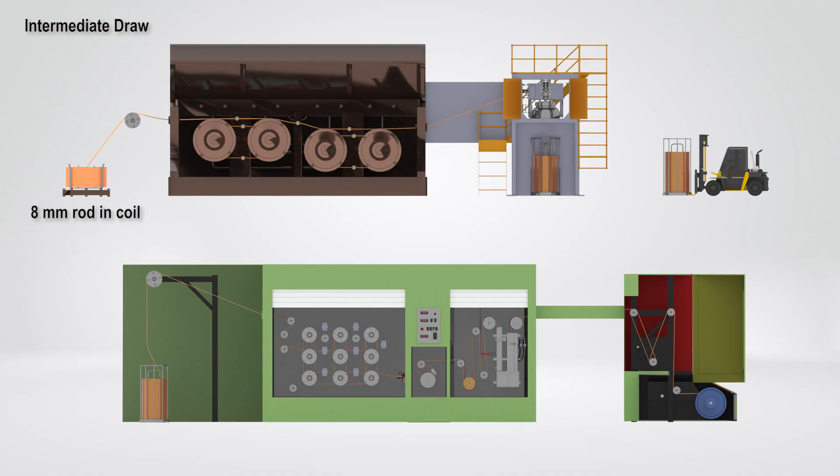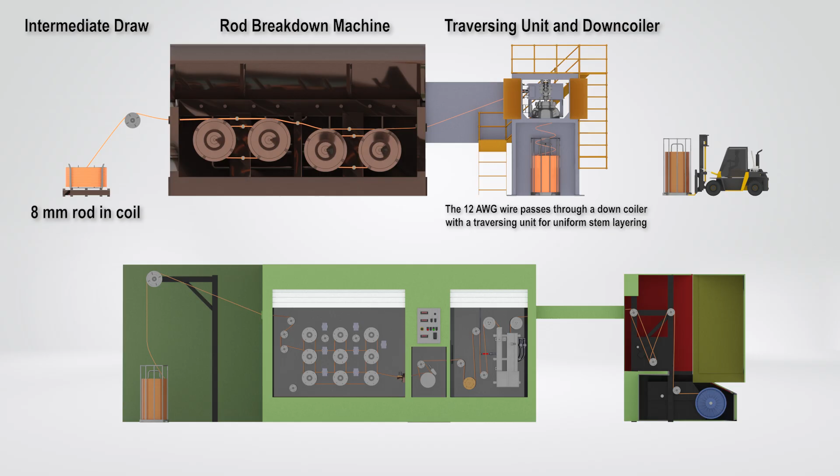Today, we're taking you behind the scenes to explore the foundational process of wire drawing. Wire drawing is a precise two-step operation that reduces the diameter of a copper rod to a finer gauge while preserving its surface finish and mechanical properties. As the first stage in conductor and cable manufacturing, the process involves pulling the copper rod through a series of progressively smaller diamond dies to reach the desired wire size.

Before drawing begins, the rod undergoes surface cleaning at the supplier's facility to remove oxides, impurities, or scales that could damage the dies during drawing. An oil-based or synthetic lubricant is applied to remove heat, reduce friction, and prevent die wear during the drawing process. The choice of lubricant depends on the intended application and drawing machinery requirements.

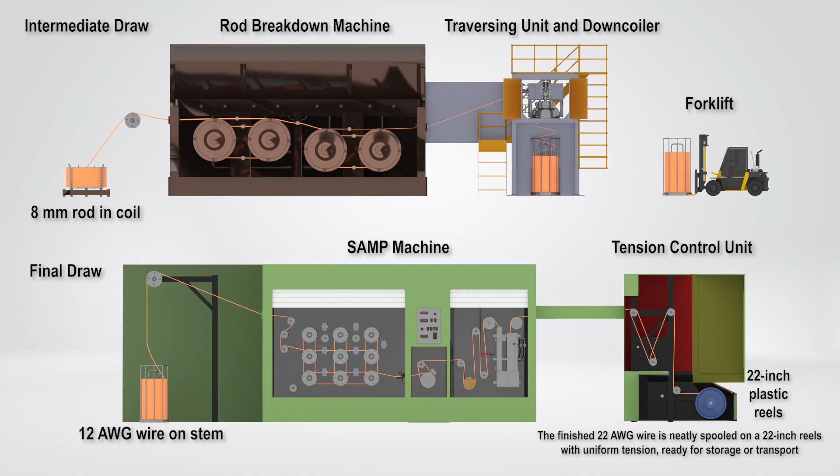The process starts with standard 8mm copper rod in coil form, made from C11000 electrolytic tough pitch copper (ETP copper) or C10100 oxygen-free electronic copper (OFE copper), depending on the application. Copper wire rod is electrolytically refined and soft-tempered, delivering excellent conductivity and workability.

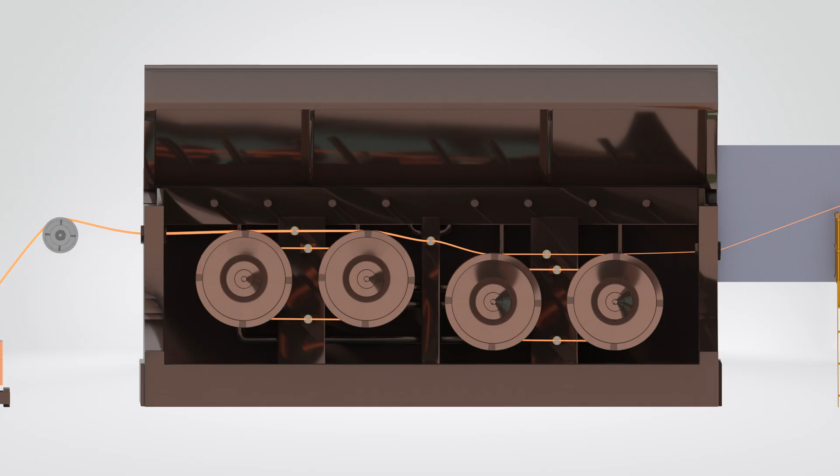The first stage of wire drawing, called the intermediate draw, is performed by the rod breakdown machine. In this stage, an 8mm rod passes through multiple dies, gradually reducing its diameter to typically 12 AWG, 2.053 millimeters. As the diameter decreases, the rod's length increases to maintain consistent volume.

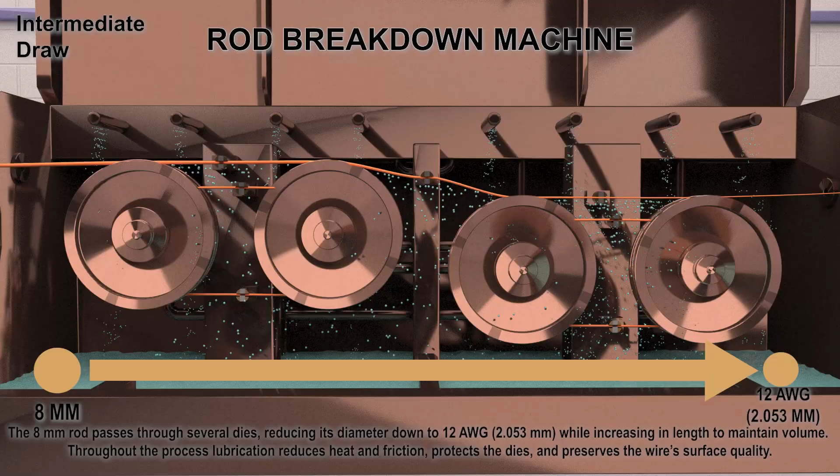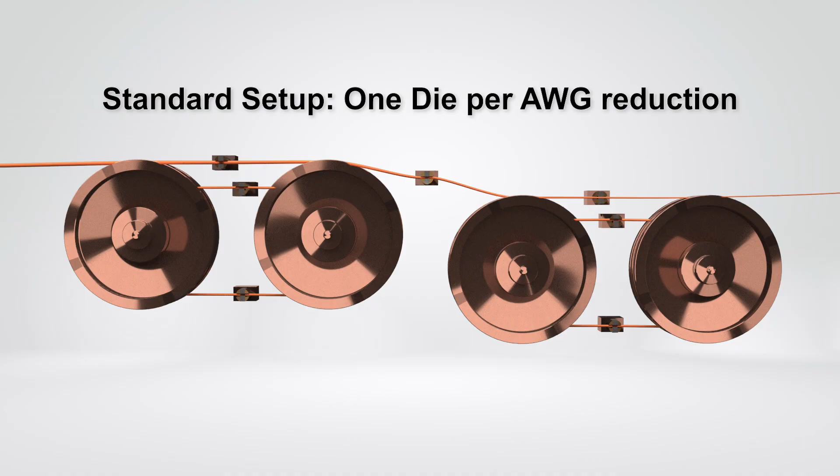After passing through dies, the wire reaches a hard-tempered state and won't be annealed again until it's drawn to its final gauge. Most dies reduce the wire by 1 AWG size, but machines with overdraft capability use fewer dies, cutting tooling costs.

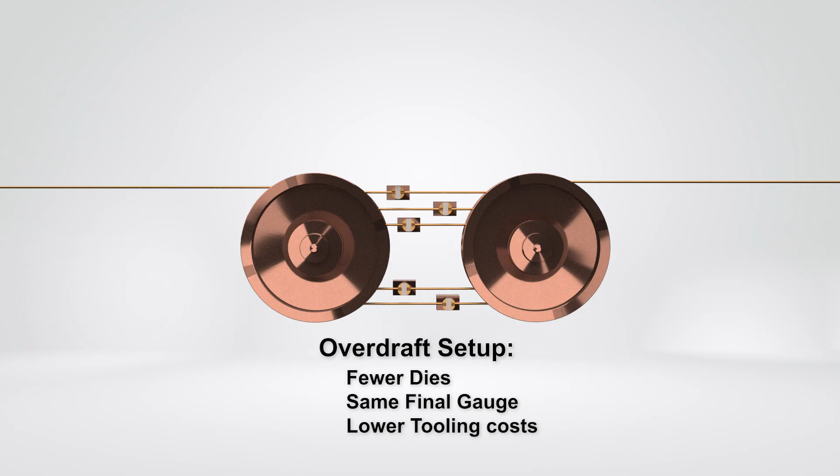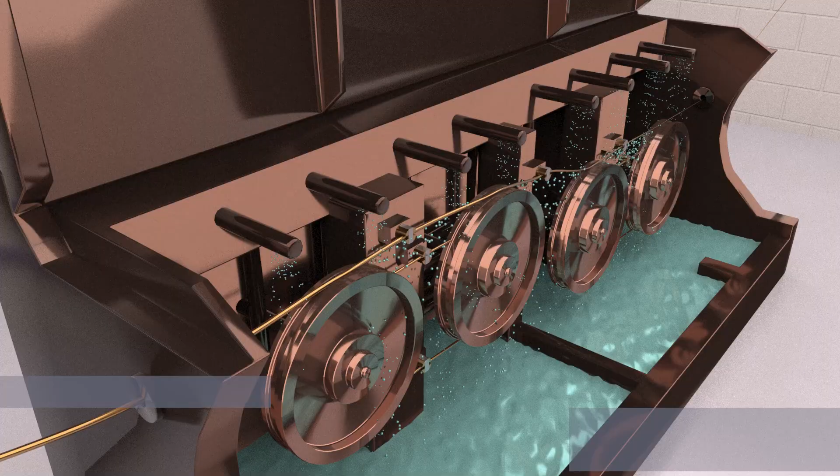Throughout the process, continuous lubrication minimizes friction and heat, protects the dies, and preserves the wire's surface quality. Oil-based lubricants are economical and commonly used for larger diameters, while synthetic lubricants are ideal for finer wire and cleaner operations, but may be more expensive to maintain.

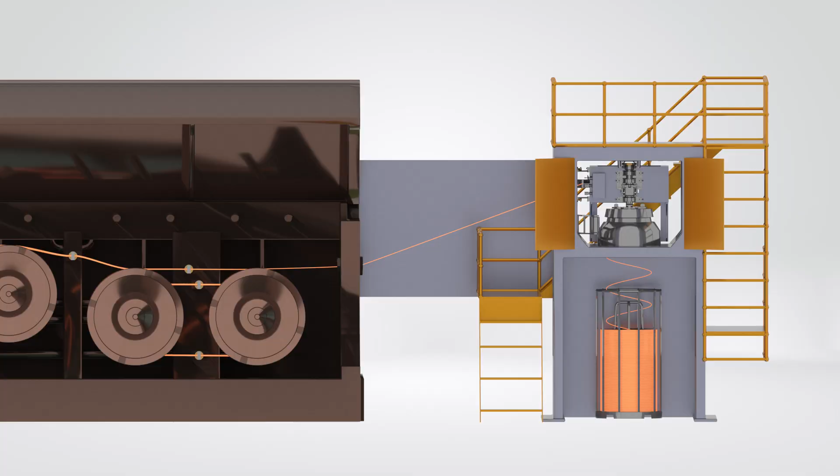The 12-gauge wire is then routed through a down coiler equipped with a traversing unit that ensures uniform layering onto the stem. This organized coiling prevents tangles and enables smooth unwinding during the next drawing phase. The coiled wire is collected into a 4,000-pound capacity stem, ready for the next operation.

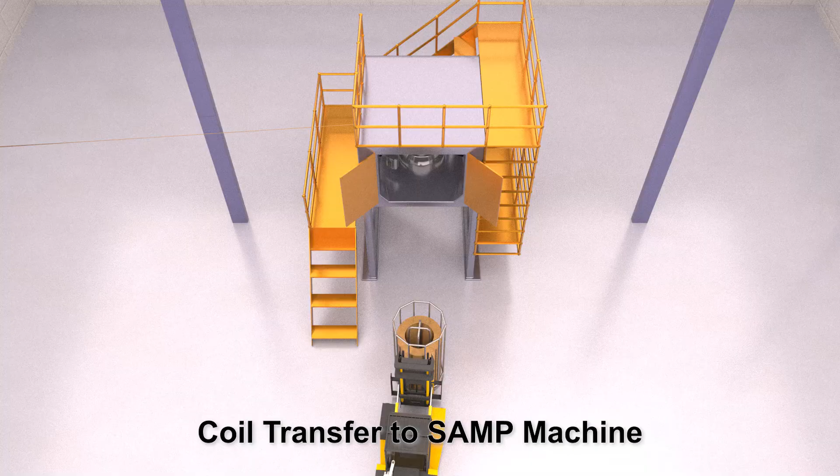The filled stem is transported by forklift to the SAMP machine, where the wire undergoes its final draw. A high-mounted pulley system guides the wire into alignment for its final pass, where precise dimensions and surface quality are achieved. The SAMP machine is where the wire achieves its final diameter and a precise surface finish. It houses a series of integrated components that work in perfect coordination.

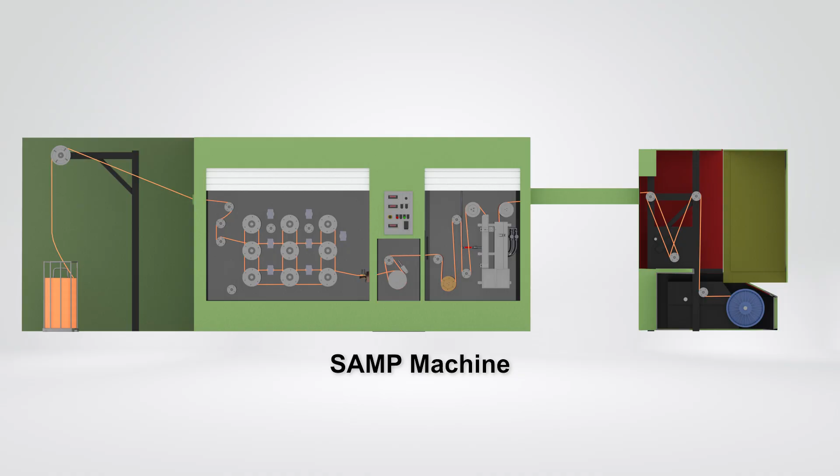The draw section terminates at the finished die and finished capstan. The inline annealing section. The cooling section. The tension control spooling section. A digital controller, accessed through the digital control panel interface, ensures that these four components work in unison.

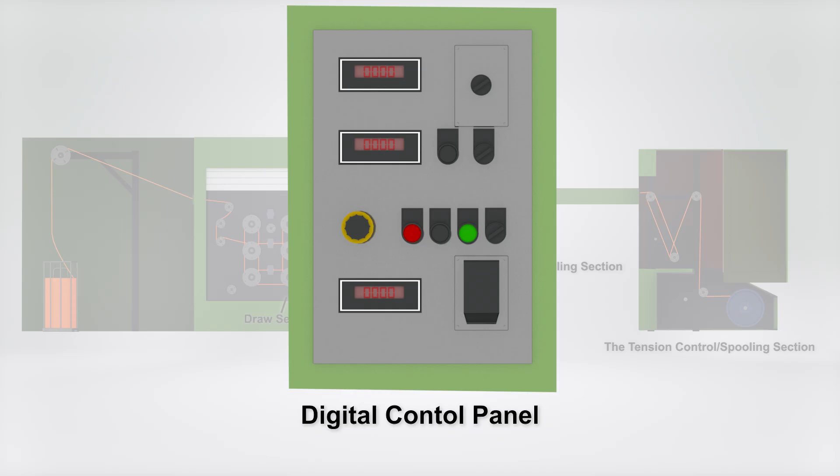Inside the draw section of the SAMP machine, wire is pulled through a series of precision dies and capstans, which work in tandem. This precise alternate arrangement ensures uniform elongation while protecting the surface from stress or scoring. Each die reduces the diameter of the wire, while each capstan pulls it forward and maintains controlled tension.

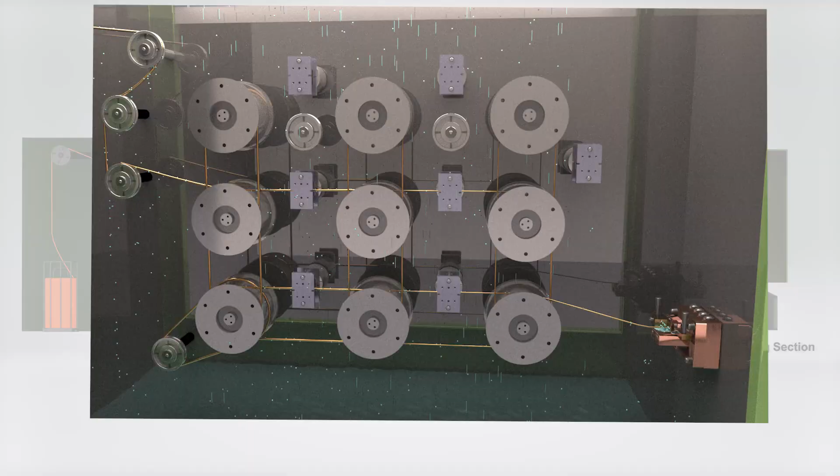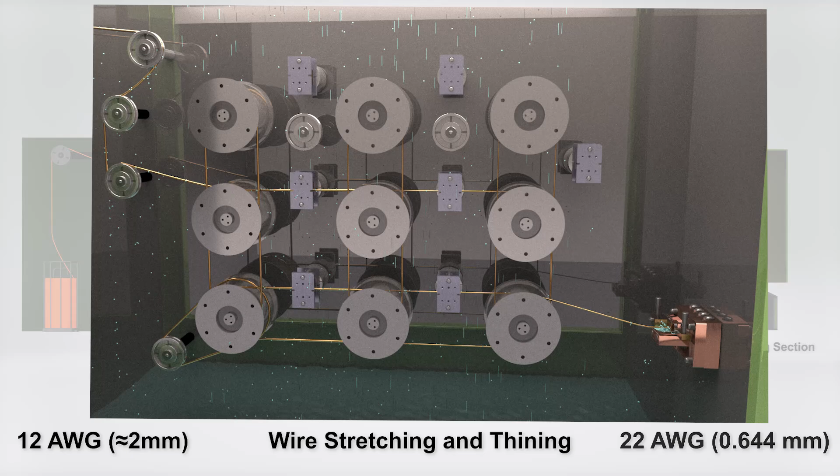The wire enters at 12 gauge, or roughly 2 millimeters, and is gradually drawn thinner as it passes through each die capstan pair. Before exiting the draw box, the wire proceeds directly into the finished die, where the wire reaches its final diameter, 22 gauge or 0.644 millimeters. The finished capstan pulls wire through the finish die and directs it into the annealer section.

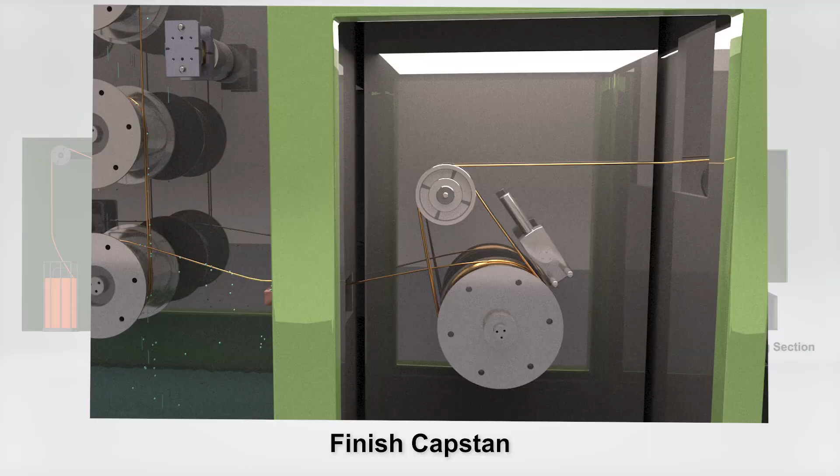To maintain production efficiency, drawing machines operate at speeds reaching hundreds of meters per minute. The digital control panel continuously monitors and adjusts line speed in real time, ensuring smooth movement, stable tension, and perfect synchronization across all SAMP components. Proper tension ensures uniform wire diameter reduction without breaking. As RPM levels rise or fall, the wire's motion through the drawing and annealing sections shifts accordingly.

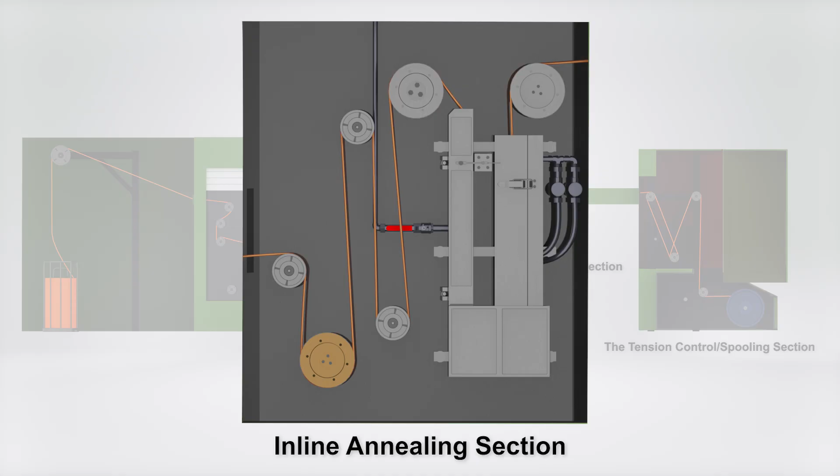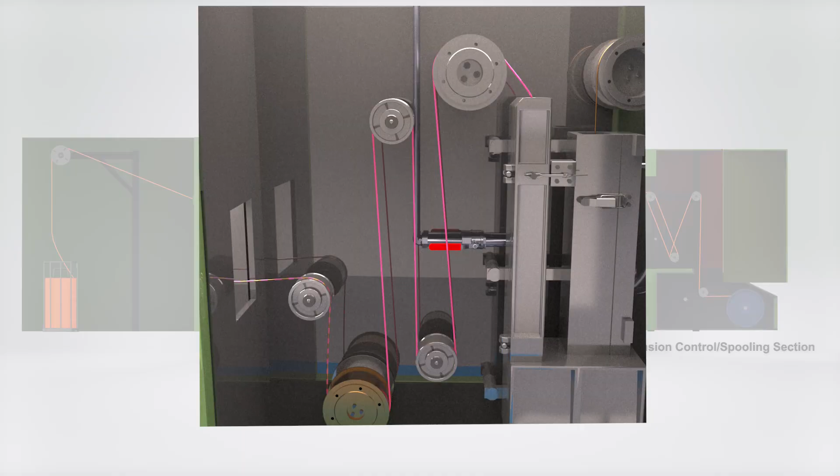We move on to the inline annealing section, the key component responsible for heating the wire to the necessary temperature for annealing. This section begins at the initial annealer contact pulley, where current is first introduced into the wire. Then wire passes over a series of conductive pulleys, which maintain a steady connection while spinning. The current flow initiates the resistive heating process, preparing the wire for annealing.

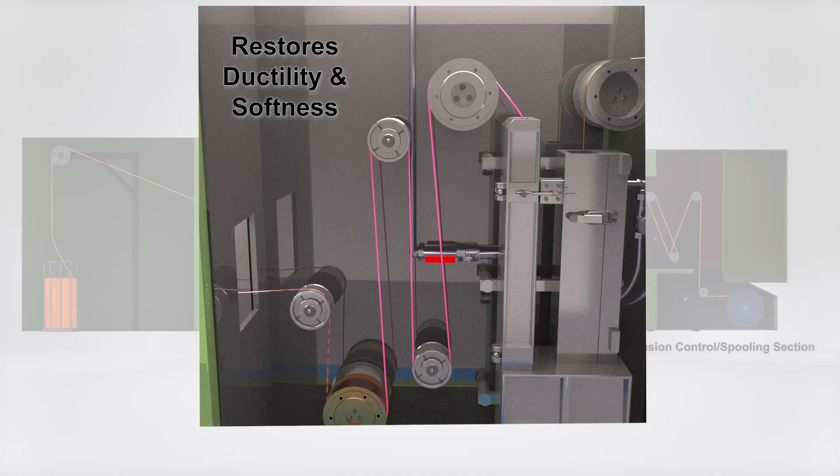In the inline annealing section, the wire itself becomes the heating element, generating heat as current passes through it, and this localized heat softens the wire, relieving internal stresses accrued during the draw process. The annealing process restores ductility and soft temper, transforming the conductor into one that is flexible and ready for further applications. Annealing occurs at specific temperatures, typically between 350 and 650 degrees Celsius, depending on the desired level of softness.

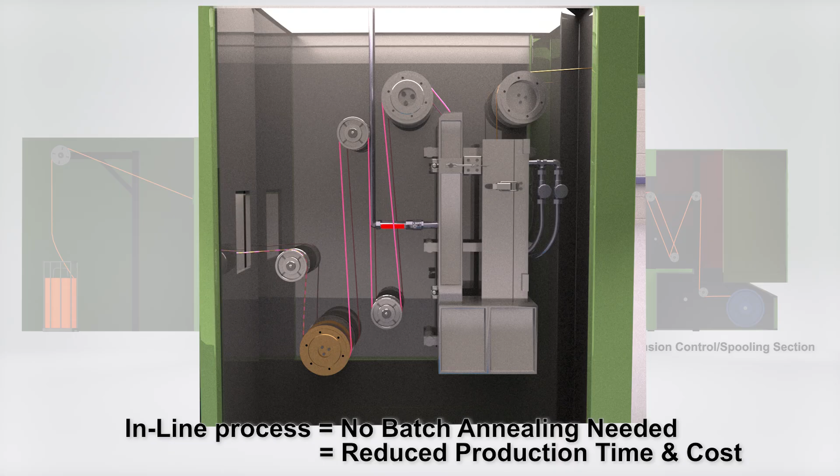Continuous inline annealing is a manufacturing advantage. It eliminates the need to batch anneal reels of hard wire, allowing for significantly lower production time and cost.

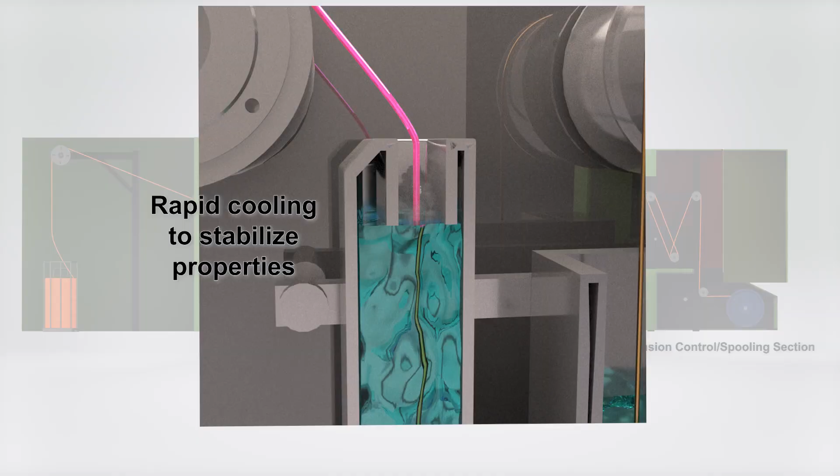As annealing is completed, the wire proceeds towards the cooling section. Immediately after annealing, the hot wire is submerged in a cooling section filled with circulating fluid. This rapid thermal shock halts the annealing effect and locks in the mechanical properties. The wire is now stabilized and ready to be spooled.

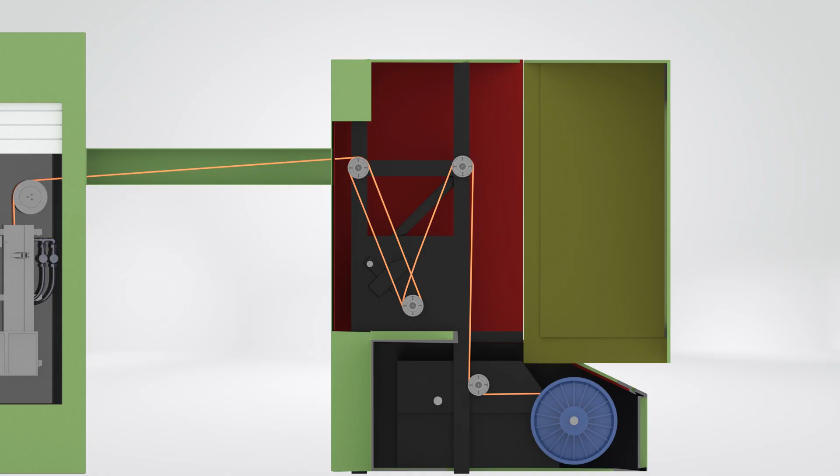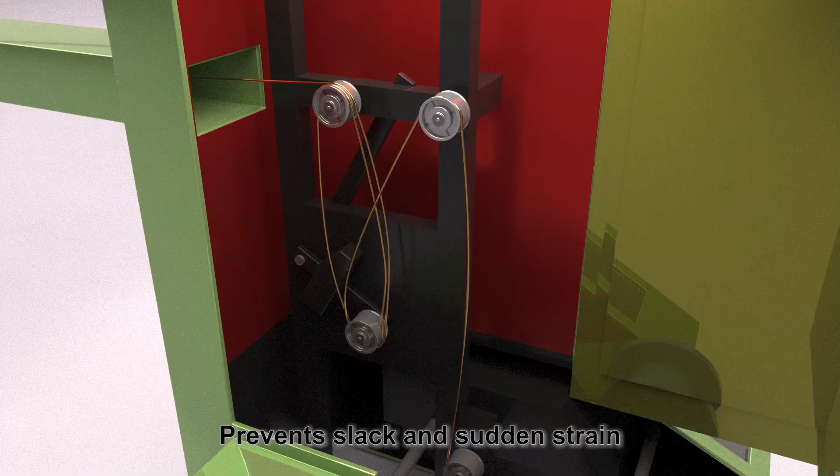Next, the wire passes through the tension control unit. As the wire softens during annealing, it becomes more vulnerable to deformation, so maintaining consistent tension is essential. The unit adjusts automatically for speed variations, ensuring smooth and controlled movement between the draw machine and the spooler. This guarantees that the wire is wound evenly, without loops or inconsistencies, while preserving strength and integrity.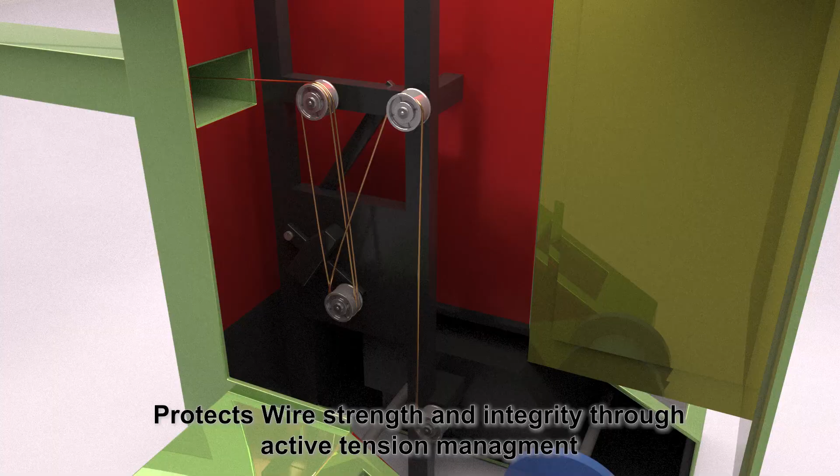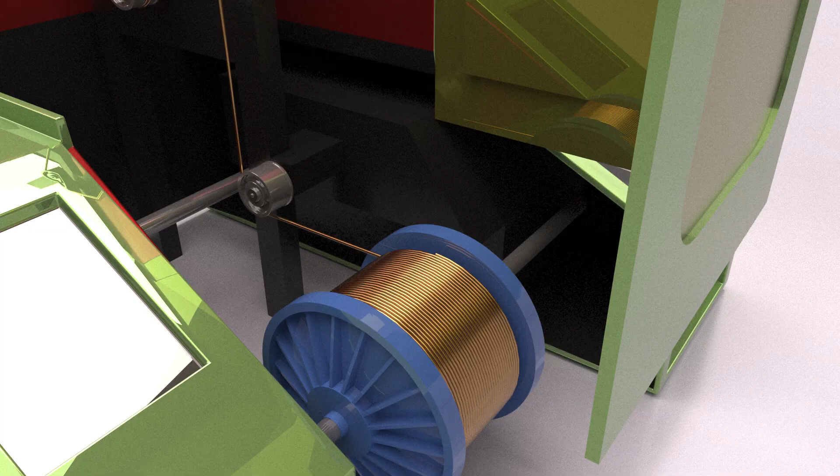From here, the wire moves toward its final destination, the spool. It travels upward, guided into the spooling station. Here, the finished 22-gauge wire is spooled on 22-inch plastic reels. Thanks to the tension control unit, the wire wraps neatly, with even layers, without stress or slack. Each reel, identical in form and quality, holds wire that is ready for storage or transport.

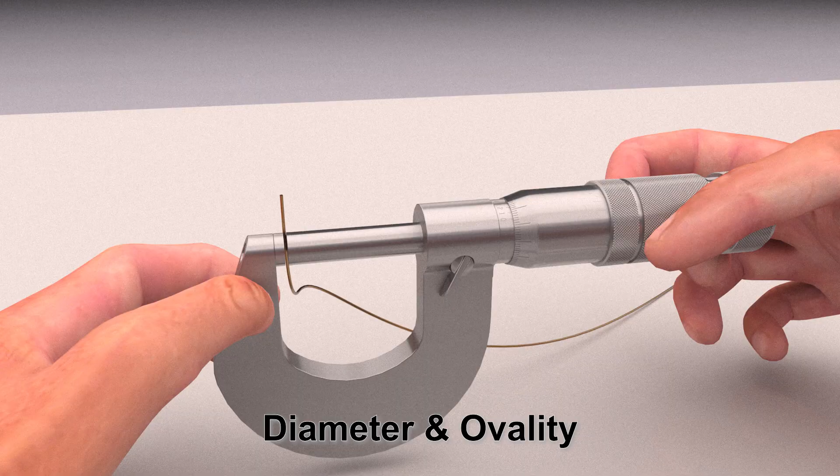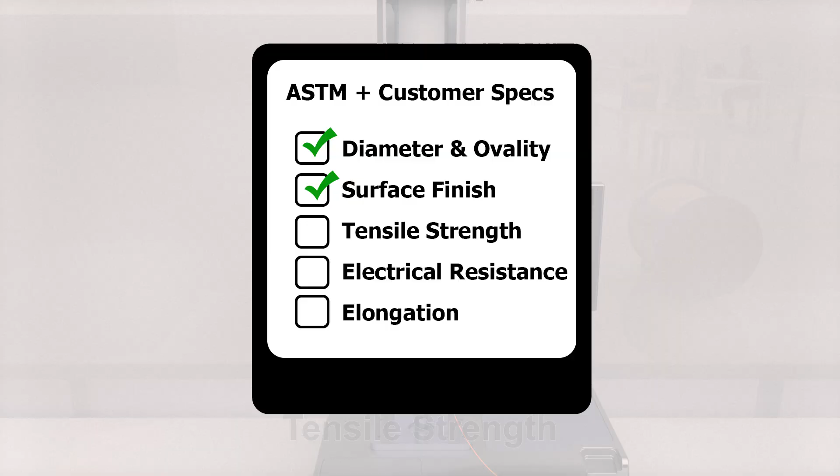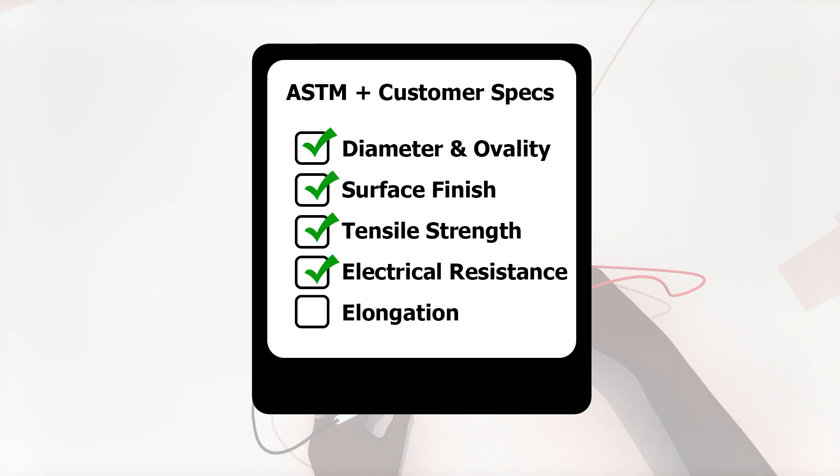Before these reels leave the facility, they pass through stringent quality inspections handled by trained inspectors. Each wire is tested for diameter and ovality, surface finish, tensile strength, electrical resistance, and elongation to ensure it meets every specification.

All evaluations follow ASTM and customer-specific standards, ensuring total compliance. Every box is checked, every measurement logged, so every reel leaves certified and trusted. This isn't just quality control, it's a guarantee of performance and precision.

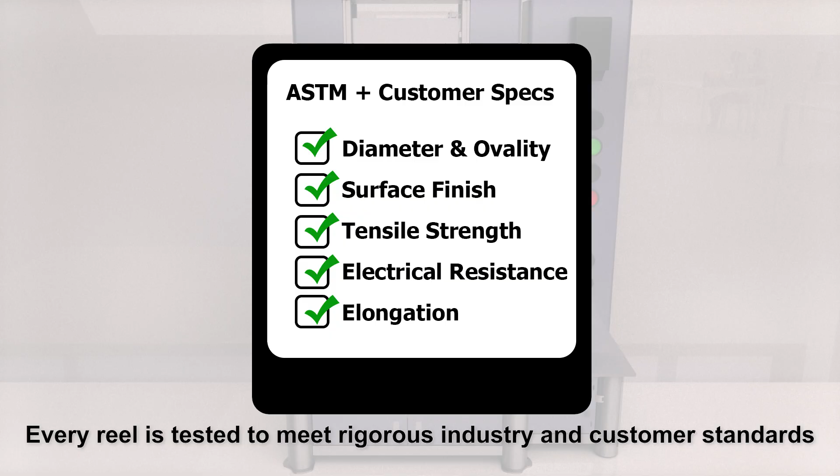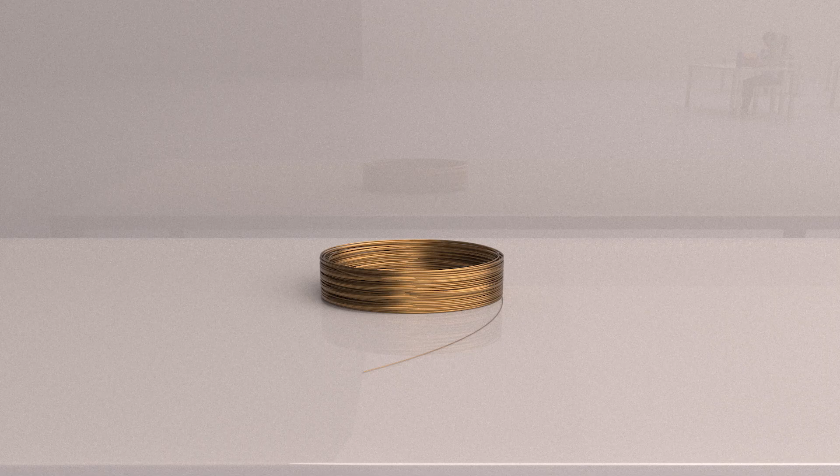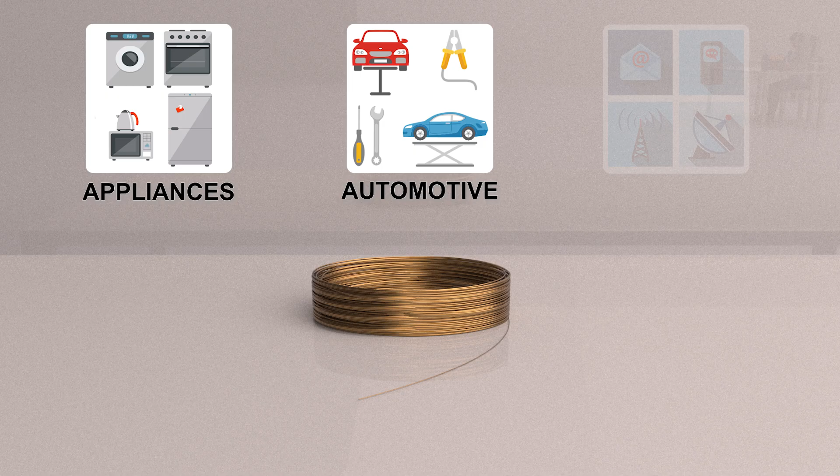Thoroughly inspected and certified, the wire moves forward for final use. Each spool carries a product engineered for performance. This is 22-gauge copper wire, known for its flexibility, soft temper, and high conductivity. It is engineered for demanding electrical and electronic environments, from appliances and automotive systems to telecommunications and beyond. This wire is ready to connect the world.